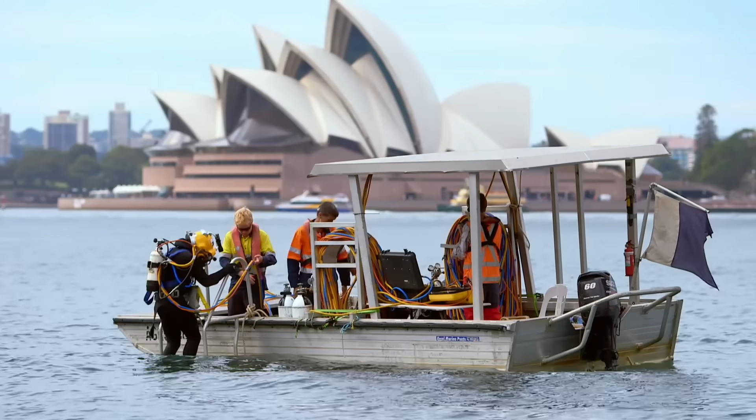No one has ever embarked on the scale of what we're doing here. In Australia, engineers are taking on an extreme challenge. There's constant problem solving. Every day there's new problems, new issues. Trying to clear suffocating traffic congestion by building an immense state-of-the-art metro through the heart of Sydney. We have to get there, there's no other way.

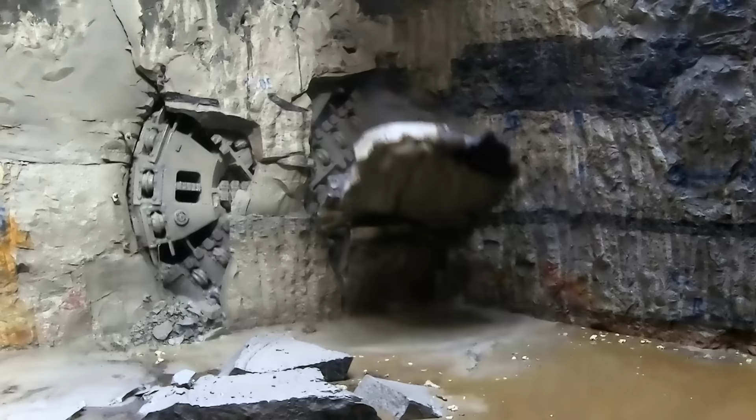The stakes are high. You've got to take every bit of luck you can get in this game. This is, by far and away, the biggest public transport project in Australia's history. If I'm honest, I probably didn't quite know what I was getting myself into.

Sydney, one of the most recognisable cities in the world. It's got the Opera House, the Harbour Bridge, Bondi Beach, and traffic. Endless traffic. But that's about to change. Now a crack team from around the world is tackling the problem head-on, battling to build a world-class metro without bringing the city to a standstill.

They've come from the UK. Mega projects gets thrown around like confetti. What makes us different is just layers and layers and layers of mega. It should just fit together like a really nice Meccano project.

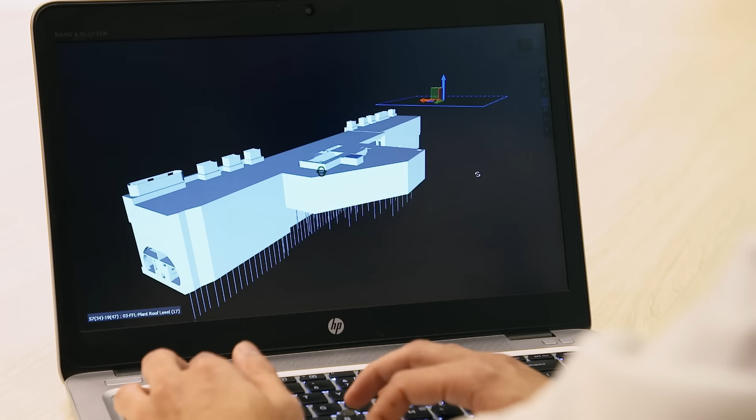From the US: I'm here to dig tunnels. I'm here to do stations, excavations, you name it. I love it.

From France: the design for Sydney Metro is unique, a very creative design, only for Sydney. From Germany: when we are tunneling under Sydney Harbour, there are no second chances. And from Italy: it's the future of mobility for this city.

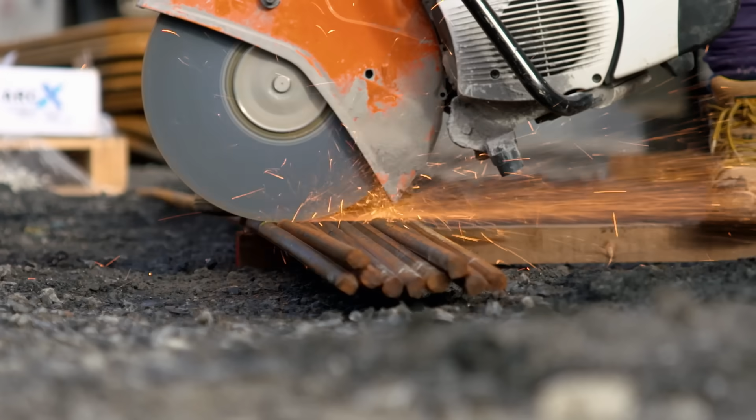40,000 people will build this metro, most of them Australian. It's definitely the biggest role and responsibility I've had. I'm loving it. I've personally developed and grown working on this project, and I think the whole team has. It is interesting. Not very often you get to dig a big hole right in the middle of Sydney.

The hole James Pearce needs to dig is in the toughest location imaginable: right in the middle of Central Station, the busiest rail hub in the entire country. 99.5% of Sydney trains travel through this station every single day.

So it's a huge undertaking. We've got 4 pedestrian tunnels through the middle of the station box, and 3 of them we need to keep open at all times, 24 hours a day, 7 days a week, 365 days a year. The station doesn't shut down at all.

James has to remove more than 500,000 tonnes of earth, 6,000 tonnes a week, without disturbing Central's almost 2 million weekly passengers. It's a highly complex task. But James is up for the challenge.

So here we are right in the middle. These platforms all need to go to let us dig 30 metres down into the ground and connect into the new tunnels, which will be the metro trackway. So all these platforms, time to go. Pigeons out, we're coming in.

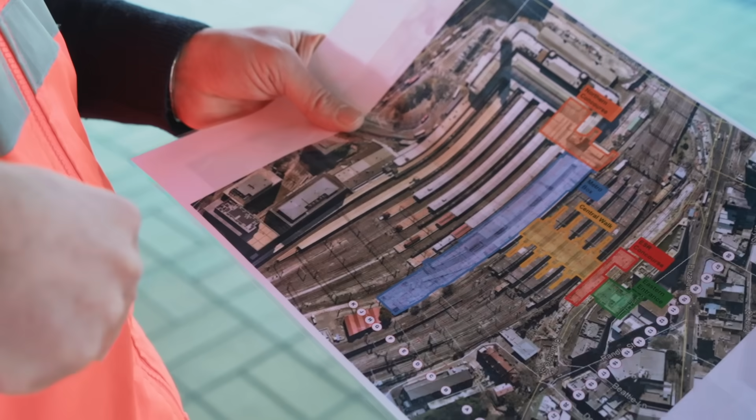His solution is simple: if you can't go around the passengers, go over them with a truck bridge. There's no access the whole way around Central Station. 230,000 cubic metres of material to come out. Every single truck movement for the project will be in and out over that bridge, one way in, one way out.

A 500-tonne crane, with the largest beam 55 metres long. James is only allowed to disrupt train services for 12 hours, so they're bringing in a prefabricated bridge, 400 tonnes of it, fully sealed, so they can drop the concrete in.

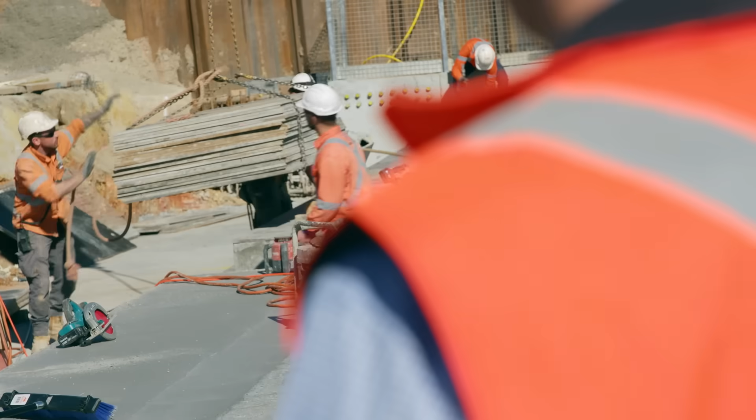It will be a race against time to crane in the gigantic steel spans. Right next door, lines will remain active, with 1,500 deadly volts that must be avoided. Abutment B is extremely close to the live rail. James backs himself and his team to get the job done before the Monday peak arrives.

It's going to be a totally different scene on Monday morning. There's going to be a whole heap of steel across here, and the trains will travel under the bridge for the first time. Digging up the middle of Central Station is just one of the many enormous challenges that confronts the team.

From here, one line needs to run north through a minefield of subterranean obstacles deep under the city, under the harbour, and 50 kilometres out to the northwest. Running south from Central Station, another line will swing 20 kilometres out to the southwest. Next, another line will leave the city and travel 25 kilometres due west to Parramatta. Yet another metro line will then connect a new international airport with the rest of the city. And further still, more lines will create a virtual metro loop around Sydney.

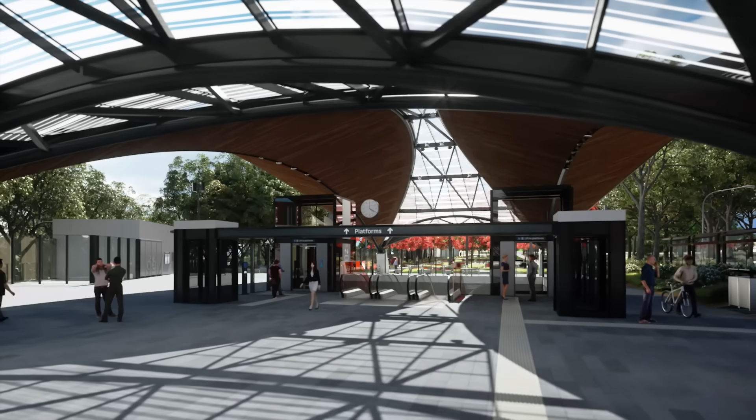More than 50 new or renovated stations need to be built, linked by the longest railway tunnels ever dug in Australia. This project is exceptionally ambitious, and it all needs to be constructed in just a few short years. At every turn, new complex dilemmas await.

One such dilemma looms at a new station site right in the city called Pitt Street. Bobby Saying is in charge of excavating this station. He has to carve out two giant holes between the skyscrapers - no easy feat considering the cramped inner city location.

Bobby's mission is to demolish, then dig. There's a total of 12 buildings we're demolishing. There's a 14-storey building here, there's a pub in the corner, a number of 1 to 3-storey buildings around the rest of the site. There's also another 4 buildings at Pitt Street South.

The access on the streets surrounding the site are very limited. The hard part is actually getting that first bit of access so you can drive trucks in, load them, and then they go out. That's correct, yeah.

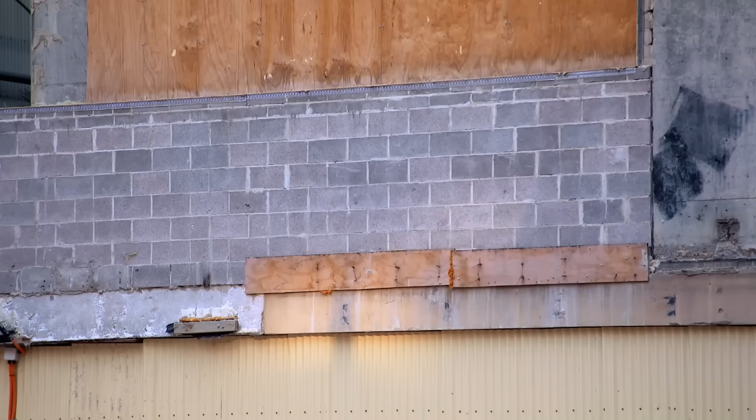12 buildings bite the dust, but one must stay. It's 41 stories high and towers over one of the massive holes Bobby needs to dig. 76,000 tonnes of earth must be extracted right next to the building's foundations. If anything goes wrong, it could be a disaster.

We're about to dig down a really big hole right next to a 41-storey building. There's a risk that because that building relies on this ground for support, as we excavate, it will cause movement.

It's no ordinary dig. As Bobby's team descends in the skyscraper's shadow, they must shore it up from below with reinforced concrete walls up to half a metre thick. They'll work slowly but surely, inch by inch, to build a concrete rampart.

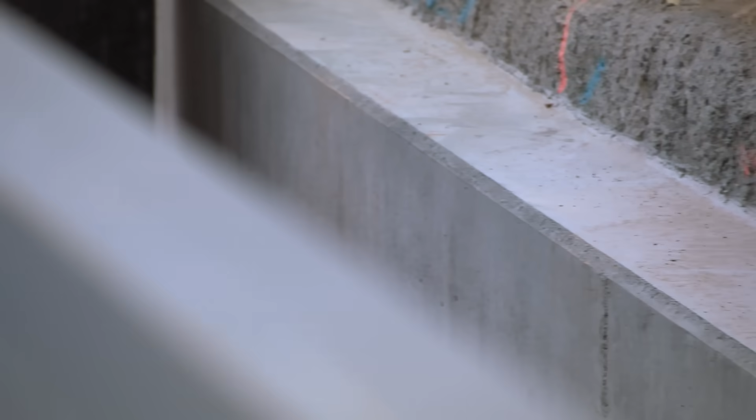We can't take away the entire shaft material and then install the wall. We have to progressively do it as we come down. Otherwise, there is a risk of movement of this 41-storey building.

To make matters worse, Bobby's work sites are surrounded by bustling buildings and businesses. They all need to keep functioning while he demolishes other buildings and then digs his super-sized holes right next door.

This is fire station number 1 in Sydney CBD. Our site is located on the back face of this building, the busiest fire brigade in the Southern Hemisphere. We need to ensure that we don't block their driveways, that we're clean and clear around their site. They operate 24 hours a day, and therefore they have sleeping quarters there as well, so we need to make sure that during the sleeping times we're not creating a lot of noise.

On the other side, there's a pub. It's also heritage listed, so a good reason not to demolish it, but it is a beautiful building, and I'm told it has a great beer. There are places people want to enjoy a quiet drink, and places where people need to sleep.

This is a hotel, and so you have guests, and you need to keep them happy. And also, in our interest to keep our neighbours happy, because we have to work with them for years on end. Gloria Fernandez shares responsibility with Bobby for trying to get this station done.

Keeping the neighbours happy is one of their top priorities. Noise has been one of the bigger complaints, as well as dust. And so really, when we put this acoustic shed up, that actually decreased the amount of complaints in that space. It's not just about doing the work and carrying on - it's about working with the community and our surrounding neighbors.

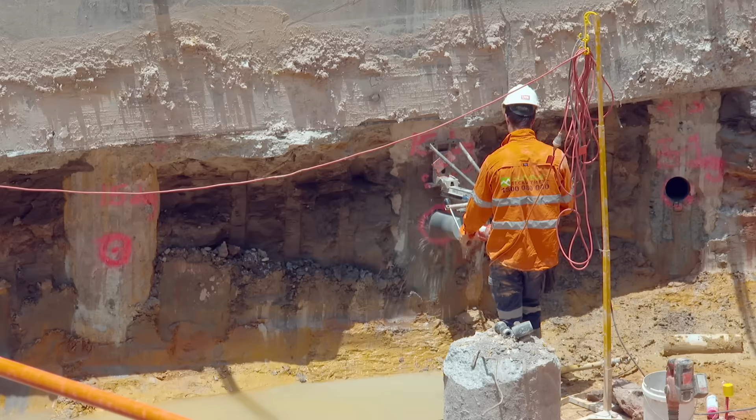With a site cleared, it's time to start digging. It's been going great. We're about 4 metres deep at the moment, and it's a total of 20 metres deep once we're done. His main concern remains the 41-storey building towering right over the hole.

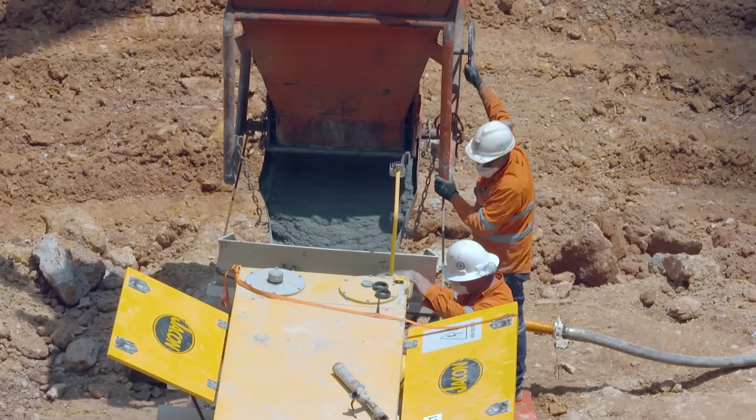As we excavate the shaft and we expose what is left there adjacent to the building, it's something that we have to look at, assess, and get our designers involved to ensure that what is there matches what their assumptions were - and so far so good.

So can Bobby be sure the skyscraper next door won't begin to lean in over his hole? I'm very confident, and I'm very hopeful, but I'm very confident that everything will be under control and we won't end up with the Tower of Pisa.

The vision for Sydney's new metro is breathtakingly bold and far-reaching. This is the man responsible for it, engineer and transport chief Rod Staples. He is both proud and often overawed by what he has set in motion.

No one has ever embarked on the scale of what we're doing here. This is, by far and away, the biggest public transport project in Australia's history. If I'm honest, I probably didn't quite know what I was getting myself into at the start. When it goes wrong, where do I go to blame someone? I go and lock myself in a room and have a good hard chat to myself.

Rod is actually not the first person to have championed a Sydney metro. Remarkably, the idea was originally suggested more than 100 years ago, the brainchild of engineer John Bradfield. In 1915, Bradfield submitted a grand plan to government to revolutionise Sydney's transport infrastructure. Bradfield wanted to build a bridge across the harbour, electrify the trains, and create an integrated, efficient railway system, much of it underground, just as was being done in London, New York, and Paris.

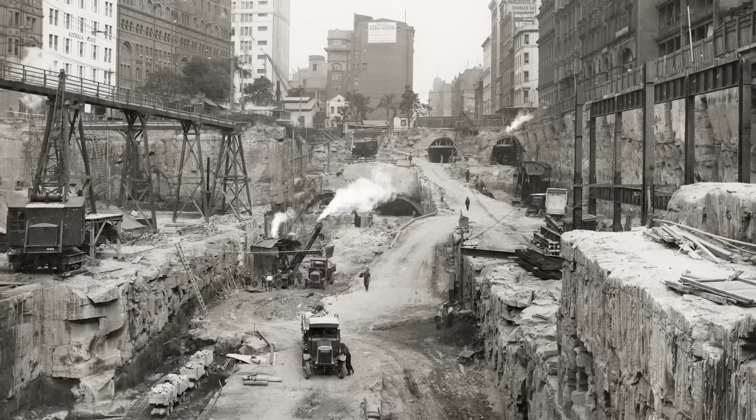The First World War intervened, and Bradfield's plan was shelved. After the war, Parliament approved the plans for the Sydney Harbour Bridge, and the building of that John Bradfield icon began. By 1926, work had started on Bradfield's other vision for a Sydney metro. Some new underground city stations were built, but then work stalled.

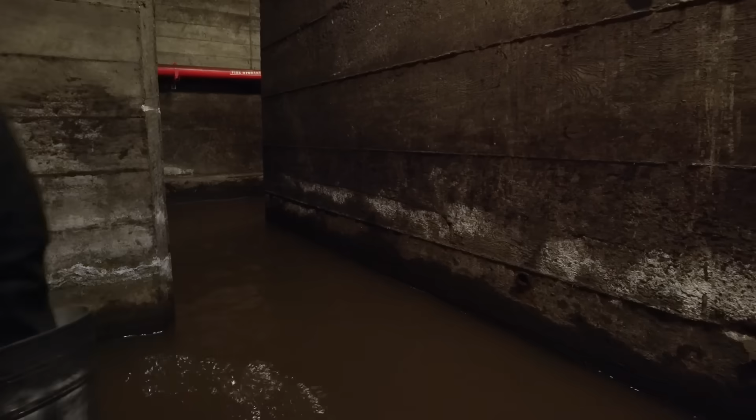Beneath Sydney are almost 1.5 kilometres of unfinished platforms and train tunnels, the incomplete remnants of Bradfield's metro. During the Second World War, the tunnels did prove useful as bomb shelters. These walls weren't here originally, they were put in for the air raid shelter, not for the railway.

The original vision for these tunnels, however, almost did become a reality. So this platform was completed nearly 100 years ago, even to the point where the tiling's in and some of the signage is up. But it never, ever saw a train run through it.

If you took yourself back to the 1920s in Sydney, it was an unprecedented amount of construction going on. People believed in Bradfield's vision and they were getting on with it. We get to the end of that decade, the bridge is finished, a bit of the plan for the railway is finished, and then the Depression hits. The money's not there. And then before we know it, World War II, and that's it, game over.

The focus really turned to other things. Fast forward to the 1950s, the car becomes the thing that everyone wants, and so the desire, the appetite to finish that plan disappeared. I just think to myself, wow, what a lost opportunity for Sydney. That really just drives me to say, well, let's go back and finish the job that he started.

Rod is on a mission. He is determined to realise what Bradfield could not.

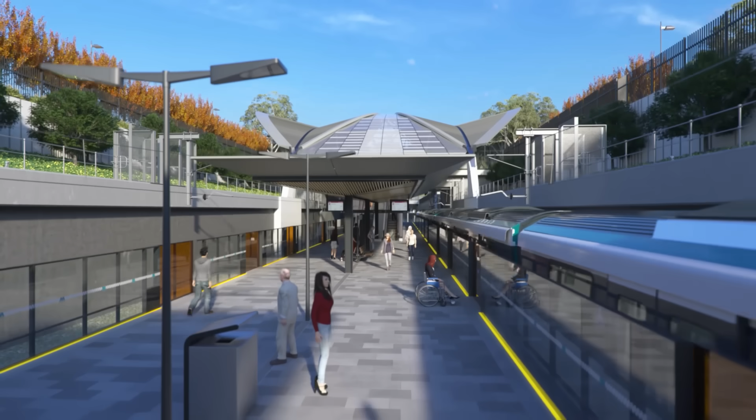Rod was convinced metro was the way of the future. Convincing others was harder. Transport officials, including Rod, said to me, 'We don't think it's sensible building the same old kind of rail line, you've got to go for a metro.' The challenge for Rod and the team was set, but what confronts them is a city that has changed radically in the last 100 years. In Bradfield's time, the population was 800,000. It's now more than 5 million.

The digging of Sydney's first train tunnels was a painstakingly slow and laborious task. Some were dug in the more traditional way, using drills, dynamite, picks and shovels. Holes were dug, walls built, and the whole thing covered over. Today, train tunnelling is a very different affair.

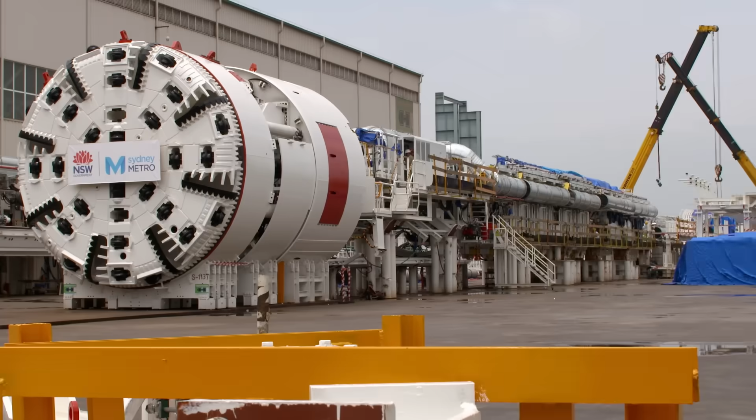Meet an extraordinary invention, the tunnel boring machine, a TBM. Sydney has ordered 9 of these. A factory in Guangzhou has just about completed the first ones for central Sydney. These mechanical beasts were designed in France and Germany.

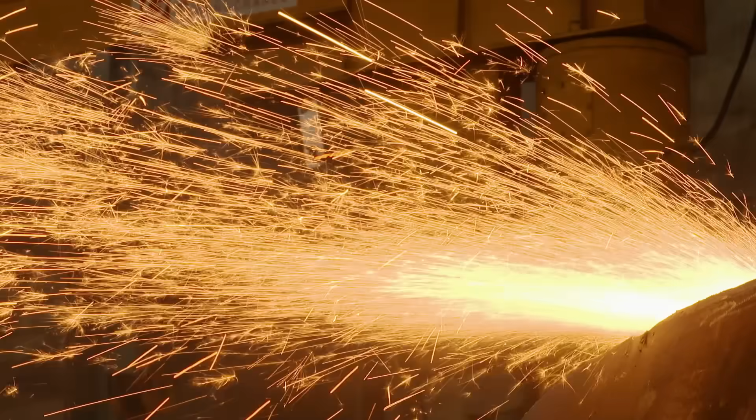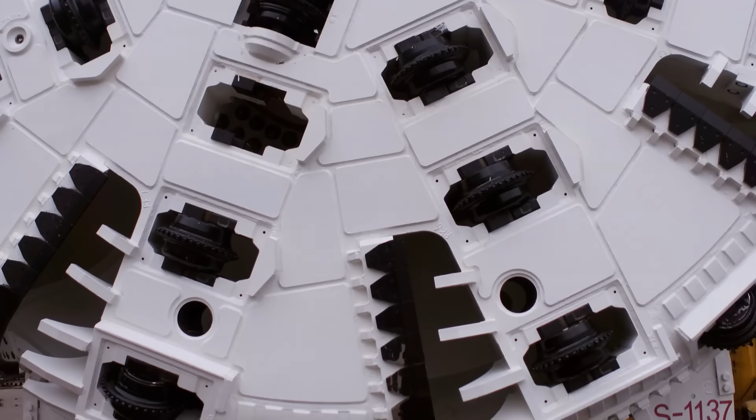TBMs are gargantuan, intricate machines. Each one will take 6 weeks to build. When assembled, they weigh more than 900 tons. A single TBM can cost more than $15 million and can cost $1 million a day to run. One stretches more than 150 meters end to end. This is the very front of it, the cutter head. This wheel of steel, more than 3 stories high, slowly rotating, pushed by powerful hydraulics, will crush and grind the rock ahead of it.

Openings in the cutter head let the crushed rock enter the machine. Conveyor belts then transport the spoil back all along the machine, out through the tunnel.

Coming up the tunnel, concrete segments. A robotic arm picks them up and places them against the rock walls, six at a time. It creates a ring of concrete, then does it all again and again. As it inches forward like a giant mechanical worm, it leaves behind it a fully formed, completed tunnel.

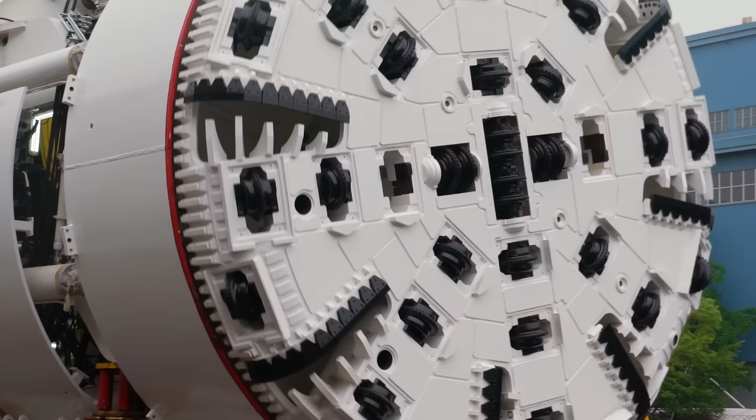It's time to test that this one works. The machine is fired up and turned up to high. Overseeing four weeks of tests is Martin Bell. This is just really proving that the machine's finished. The machine will do what we've asked.

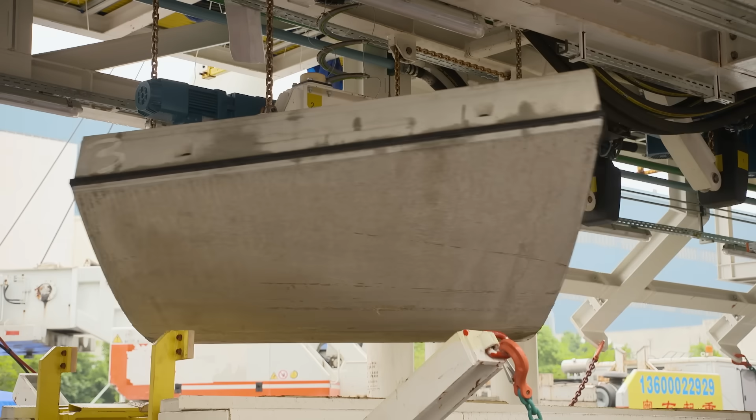It's really designed to simulate excavating the machine without actually excavating, if you like. So we're doing a trial run of all the functionality. It's basically a mobile factory at the end of the day. Once the machine's built and running, then everything's like a sausage factory, is the way it's described.

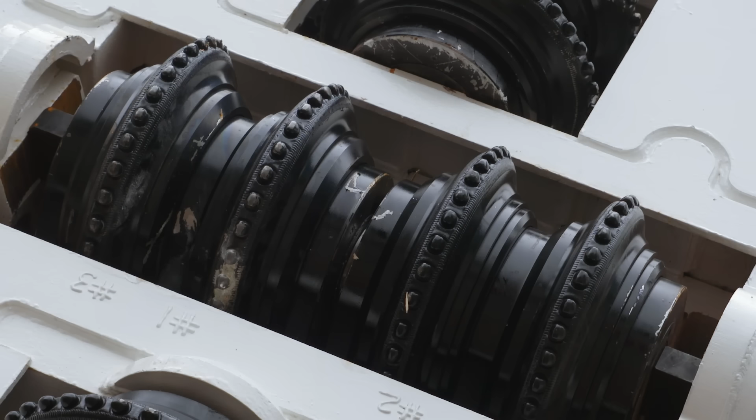Like a performance car, this TBM has been modified to help it go faster. We've introduced TCI cutters to the cutting head, so they're a button cutter. Those cutters allow us to cut a lot further. They're better suited to the sandstone conditions and minimise the amount of cutter changes we need to do.

So, does it meet the specs? Did this TBM pass the test? It's a high-quality piece of equipment. I'm excited. I can't wait to put it together and put it in the ground. That's really what it's all about.

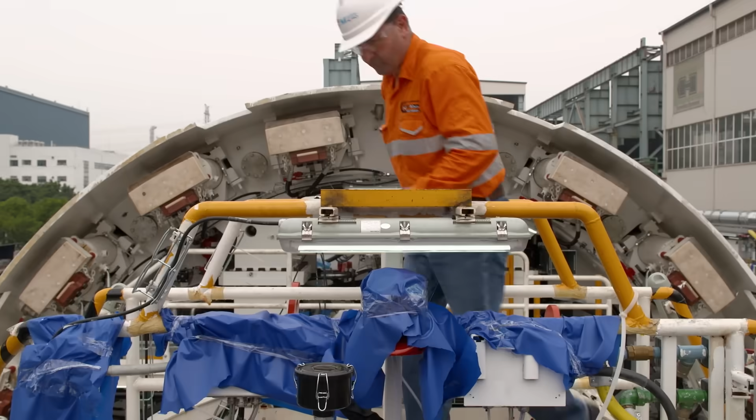And now it's the nervousness of putting it on the water and hoping that it gets off the water and gets to site. But yeah, it's a pretty proud moment. It's like being a father, I suppose. That's one down and on its way.

Back at Central Station, the clock is ticking. James Pearce and his team are in a race against time to crane in the giant steel girders of the truck bridge. He needs to get them in and balanced above the tracks before train services resume beneath. All around him, other trains keep running.

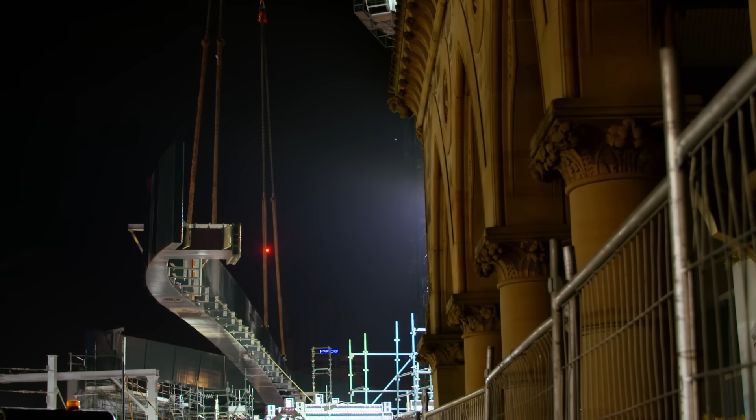So the suburban lines are continuing to operate this weekend. The intercity lines are shut down for the possession to lift in the major steel trusses over the live rail. That has been shut. We've got 48 hours between Saturday morning and late Sunday night to do all of our work and hand back the rail for Monday morning to open for the customers.

There are eight huge pieces of steel that need to be craned into place. And maneuvering them is very dangerous. 1,500 deadly volts of electricity is running through the nearby wires. This steel girder weighs 55 tons.

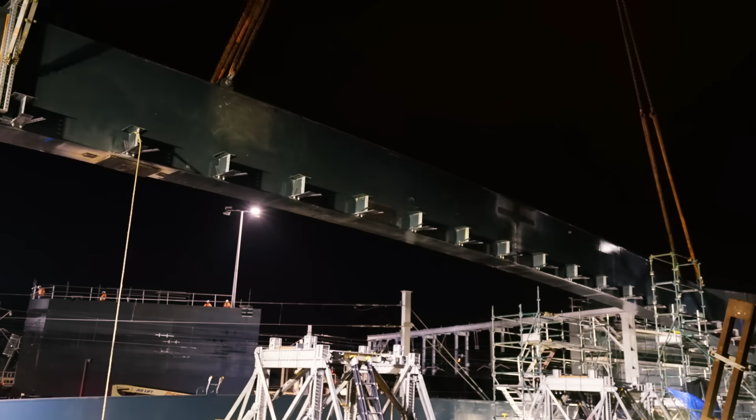We're very limited to what we can do. We've had to install the biggest tower crane in the world to come in and lift over live rail so we can lift them in the modules. They're massive pieces of steel.

This girder is more than 50 metres long, but needs to be placed with millimetre accuracy. They're landed on all of the works which have been constructed previously, so the bridge piers and footings, we drop the steel girders on and bolt it immediately.

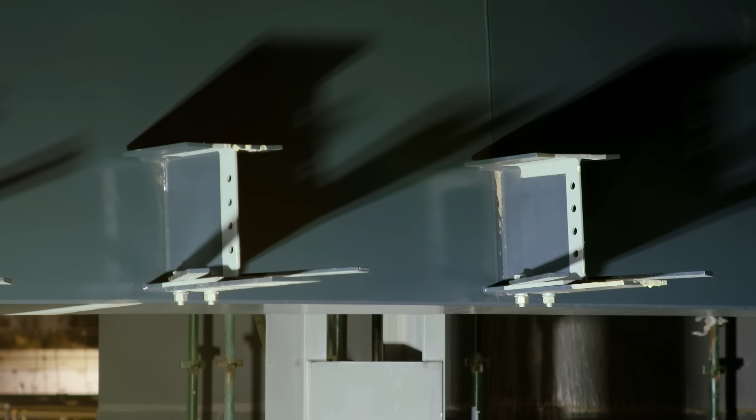One by one, ever so carefully, the giant crane lifts the giant girders into position. There's no room for error. The space is as tight as it's been on any job.

Slowly, the truss bridge begins to take shape. Oh, they're doing a great job here. There's one already in, another one to go, so pretty good night shift at this point, and then we come back later and do the decks on top.

Trucks are the backbone of any major excavation. Deep station boxes are being dug all around Sydney. So an extra 1,000 trucks a day have joined the city's traffic snarl. 1,000 trucks in and out of the city, normally with trailers, causing congestion, blocking intersections of traffic lights. It's just not a fun city to drive around anymore like it used to be.

Making sure traffic doesn't grind to a standstill rests on the shoulders of this man, Steve Jones. Even for this ex-British commando, it's a daunting task. It's going to be really, really hard. This is going to be a massive challenge.

This is going to be collaboration on a mega scale. So whether it's the Transport Management Centre that you see behind me, whether it's Sydney Trains, whether it's the ferries, everyone is actually going to have to come together and make sure there's minimum disruption across Sydney while we do it. Steve is fighting a constant battle to keep traffic moving.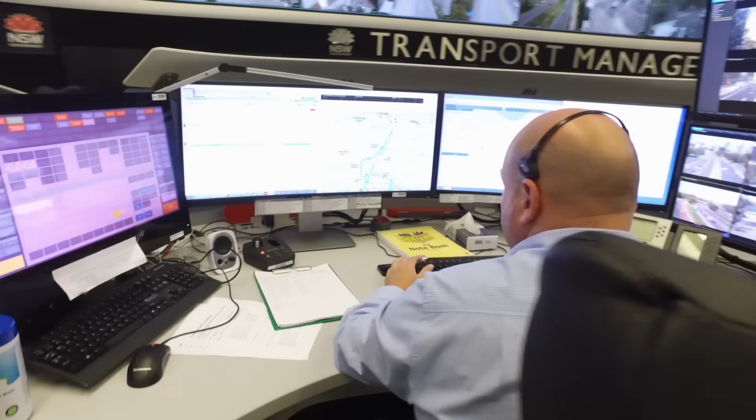In this room are 18 specialists monitoring roads, traffic lights, buses, trains and ferries. Each scrutinises their piece of the transport maze, trying to unravel problems that pop up minute by minute with military precision. In their arsenal, they have access to more than 10,000 CCTV cameras.

This state-of-the-art nerve centre is the largest in the Southern Hemisphere. This is our Apollo 11 Mission Control Centre. This is where everything occurs, this is the integration. And I say to everyone, for me, it's like that swan - it looks elegant and everything looks calm around us. But underneath, there's lots of people working really, really hard to make sure everyone gets to their destination as smoothly as possible.

So can you tell us literally what's happening now, Dave? So we're just after peak this morning on a Thursday morning, which is one of the busier mornings.

From this command centre, Steve can track the movements of hundreds of trucks every minute of the day. Trucking and the logistics is absolutely massive - we're looking at around 1,000 trucks a day in that CBD. We do all of the planning up front to make sure that disruption is kept to a minimum.

Steve knows he needs to win this battle against congestion. Whether you're delivering infrastructure or on the battlefield, it's about continuously improving, continuously testing yourself. There's a new challenge every day, and it's testing me every day.

Steve has to be very careful of the powder keg of frustration already out there. There's trucks both sides of the road - they close the roads for some time, so it caused a lot of problem with the traffic. I understand they've got a job to do, and they have to do it for the metro, which will make things so much better for people in the long run, we hope.

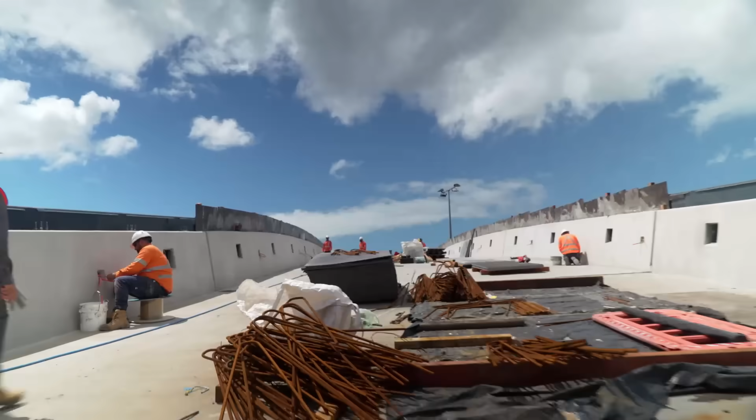Back at Central Station, James Pearce is in a battle of his own, again racing the clock. Until his truck bridge is up and running, he can't dig down, he can't get anything in or out. Once the bridge is finished, it'll be full steam ahead - fully laden trucks passing right over the heads of train passengers, passing through Australia's busiest station.

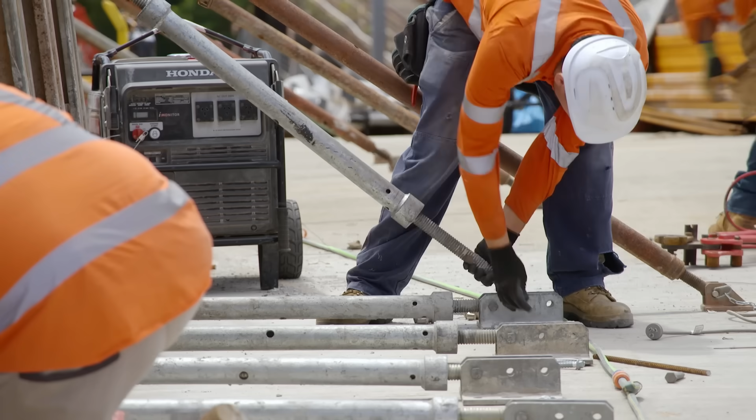So the guys have done a great effort getting the steel in. Next step, concrete - there's a thick deck to go in here, which will enable the truck bridge to carry fully loaded trucks, both in with materials and out with spoil for the main Central Station works. For James, there's one ultimate nightmare scenario.

A truck crashing over the bridge and ending up on the live rail - probably not what we want for this job in the middle of Central Station. A truck plummeting over the side would spell catastrophe, so the bridge has to be reinforced to withstand immense impacts, with big, thick concrete barriers up the side providing protection for all vehicles both in and out. With the barriers completed, James's battle with the truck bridge has nearly been won.

Around 35 kilometres from the city of Sydney is an area known as the Hills District. To build the metro out here, engineers face an entirely different set of challenges than in the city centre. Here, the issue isn't how to connect into an existing station, but where to put the new metro stations. Beneath these hills, Rod's team will dig the 2 longest rail tunnels ever dug in Australia.

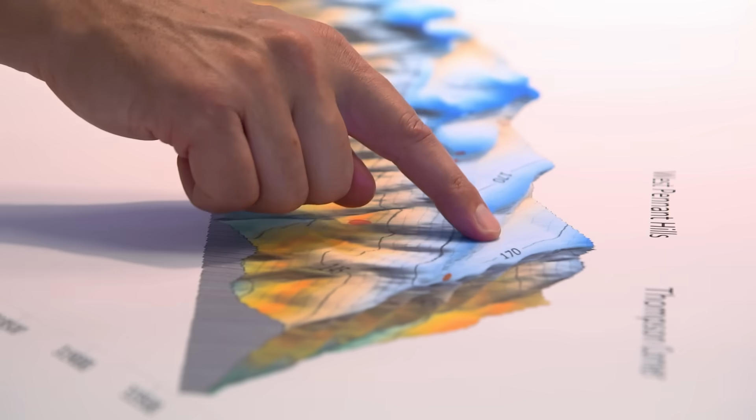The length isn't the problem, the hills are the problem. This big climb up and then being able to stay far enough north to get to Castle Hill was a big key part of the alignment planning. Whenever you're locating a station, it's a real fine balancing act between the absolute best customer outcome and what the engineers feel they can deliver in terms of the depth of the station, the terrain, and also the ground conditions and geology that's underneath.

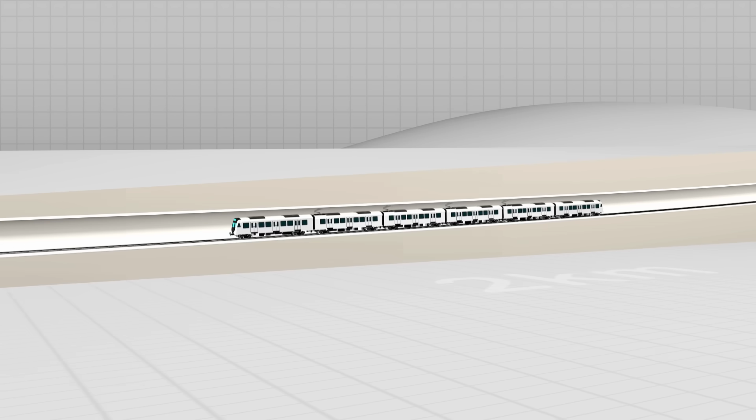The steepest gradient these trains can climb is about a 4.5% incline up or down. So the problem is, in hilly country, a station cannot just be positioned anywhere. If a station was to be placed near the top of a hill, for the train to get there, the platforms would need to be very deep underground. That's not a good result for customers - you just want to be on the train, you don't want to be spending 5 minutes getting from the surface down to the train.

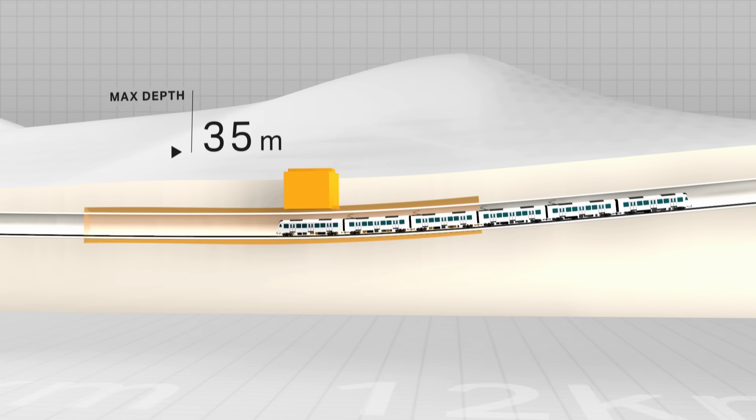So the shallower we can make the stations, the more attractive it would be. The deepest station in Sydney is about 35 metres, and customers find it frustrating. So for Rod and his designers, finding the right route and placement of stations is a careful balancing act.

They have to ensure the depth of each station and the maximum incline trains will travel to reach them is achievable. Where to put the route and where to put the stations was a massive challenge, not just from an engineering point of view, but from a whole community point of view as well.

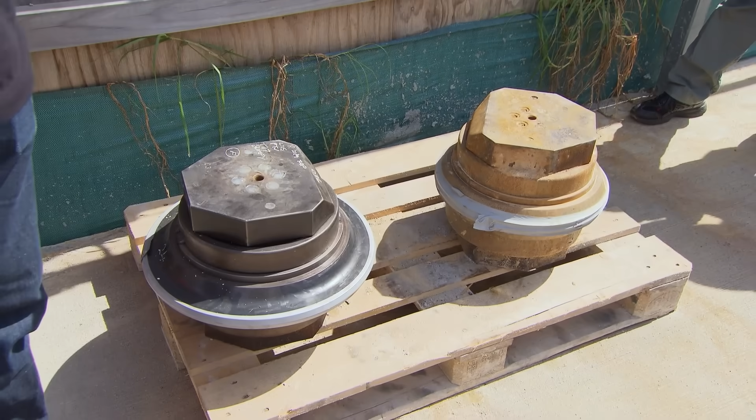In this area, Rod has had to carefully manage community expectations. Rail has long been promised here, but never delivered. People were crying out for it. There'd been decades of debate and argument about building this railway. And when I first stepped out there, I think a lot of people intuitively believed that yes, this would help, but no one actually believed that it would happen.

Rod is making it happen. For him, there's no other option. This area of Sydney has the highest level of car ownership in all of Australia. Here, triple car garages are the norm. A metro here should eliminate 14 million car trips every year. People just need to leave their cars in the garage and instead travel beneath the hills and far away.

Back at Central Station, at last the truck bridge is up and running. But James's real work is only just beginning. It's demolition time. Now 3 railway lines have to be dug up, and again, they've only got 48 hours to get the job done.

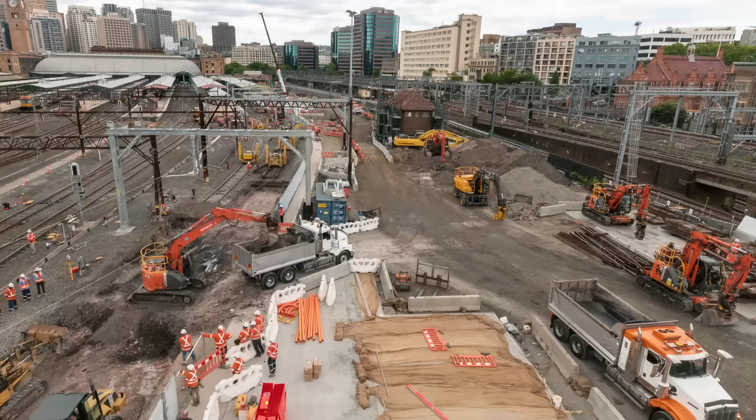From 2 a.m. Saturday to 2 a.m. Monday. To allow us to build the Metro box, we need to remove 3 tracks, 13, 14 and 15. Again, James is racing the clock. It's a critical point with limited time. We get a 48-hour window, we'll turn off the power, relocate all the wires, and then we put it back in, turn the power on for commuters on Monday morning.

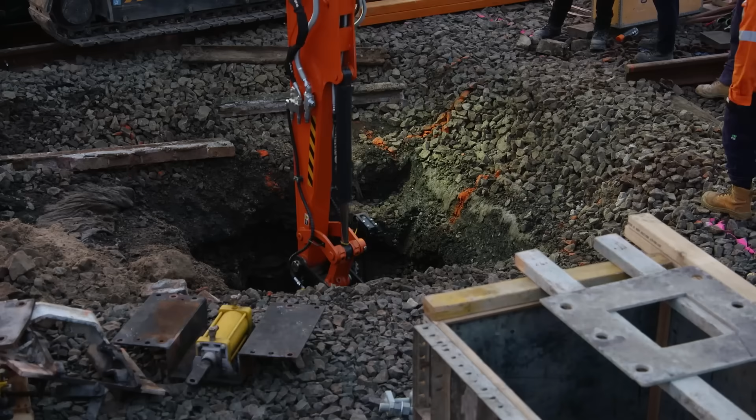As darkness descends, the rail gang gets into top gear. James first needs to remove the old tracks and then lay new ones and new overhead power lines that will divert trains away from the platforms to be demolished. 48 hours, that's it. We don't have any more time and we need to get the tracks open for customers on Monday morning. The clock is ticking and the team are pressed for time.

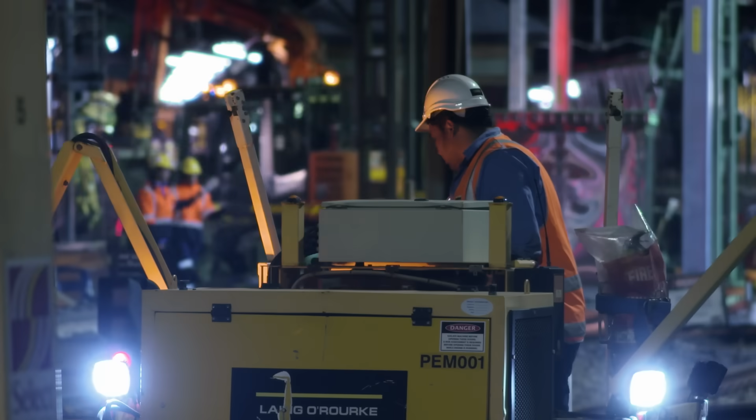But they can't jeopardize safety. There are 200 people working here, surrounded by moving double-decker trains and live power lines. Some are just 4 meters away. We're dealing with live rail, we're dealing with buried services and signal cables, we're dealing with turning the overhead wire back on and the reinstatement of it. It's a huge piece of work compressed into 48 hours.

As Saturday ticks over into Sunday, there's still an enormous amount of work to do. Soon there's only 22 hours to go. Time is rushing by. Moving the overhead lines is one thing that can't be rushed. All the surrounding lines are still active. 1,500 volts courses through each of them.

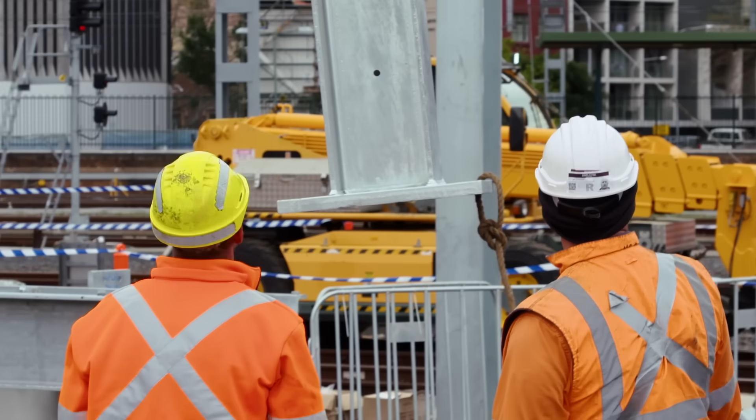We actually need to relocate the track and the overhead wiring. So all of the guys here are working together to do it safely, but we do need to recognise live power on both sides, very specific controls on both the cranes, excavators, and with all the people doing the work.

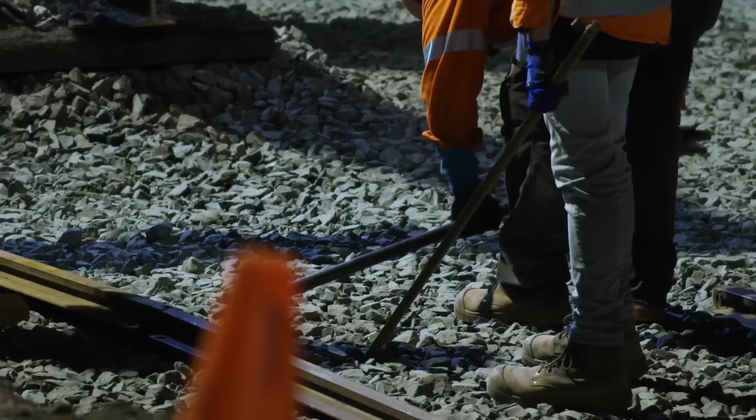Finally, the old track is gone, and as night descends again, time is running out. The pressure is building. If they don't finish in time, there will be nowhere for trains relying on these 3 lines to go. Monday peak hour will be chaos.

Then a strange-looking machine is brought in to speed things up. It's called the crab walker, and it's obvious why. To save time, the new track is prefabricated off-site, and the crab walker lifts it carefully into place in large pieces. The crab machine, or the PEMLEM, comes in and speeds it up rather than laying every sleeper by sleeper.

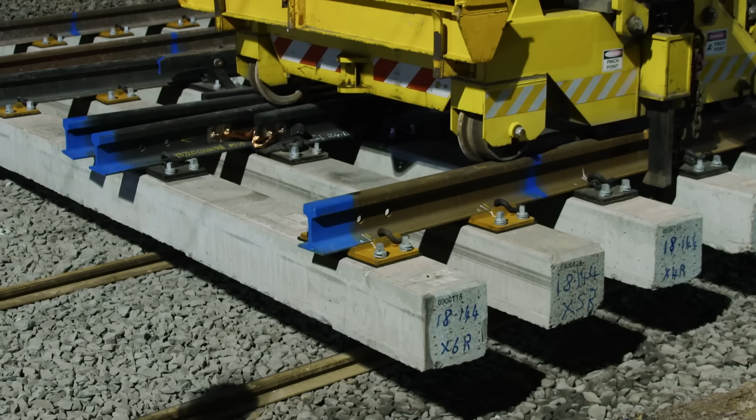The new section of track gets picked up outside the alignment, the crab walks across, drops it into place, and then we tie it in and reinstate the ballast, tie the track in, open it up and away we go. We've got about 2 hours to go, everything's on track, no pun intended, should be right. And the trains will be back in a few hours for Monday morning peak hour. They make it with 2 hours to spare.

About 160 kilometres from Sydney is the port city of Newcastle. It receives thousands of trade shipments from around the world every year, and now the gigantic TBM components are starting to arrive.

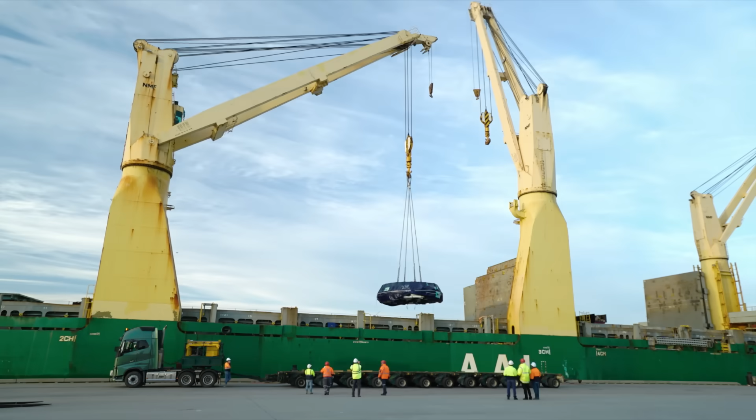Some of the modules of these monster machines are extremely large. The cutter head alone weighs over 100 tons, and this shield weighs over 200 tons.

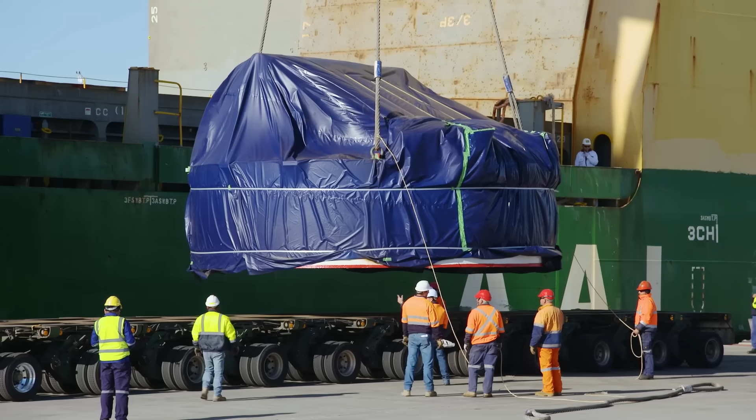After the 8 separate hard rock TBMs are offloaded in Newcastle, these huge pieces of machinery will be transported by road to 4 different launching sites around Sydney. This part of the delivery has been months in the planning, but will need to be executed precisely to succeed.

The first 2 TBMs travel to a site in Bella Vista. The next 2 will be launched at Cherrybrook. 2 more will travel to Chatswood, and the other 2 to the inner city suburb of Marrickville.

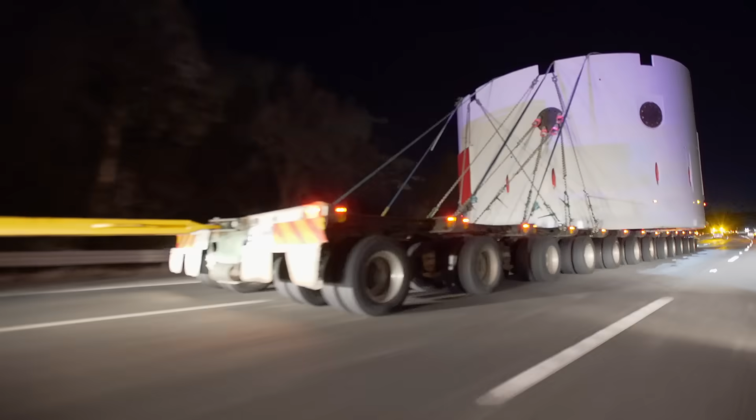The best way to achieve this is with a convoy of trucks. Like a military operation conducted under the cover of darkness, the convoy sets off. 1 TBM equals 900 tons of gear, which equals 23 trucks.

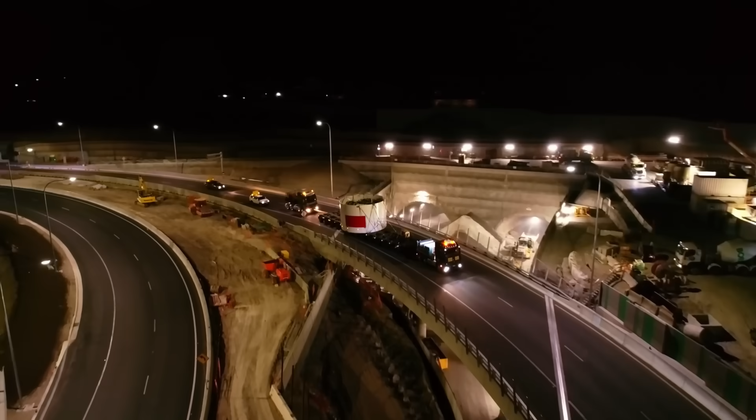Along the route, police and emergency vehicles clear the roads ahead. The route has been carefully mapped out to avoid weaker bridges that could be severely damaged by such heavy machinery, and those that are too low for the trucks to fit under. Some are cleared with little to spare.

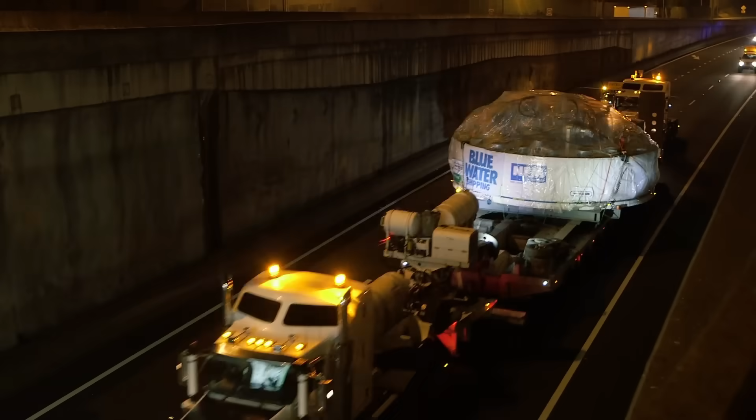The further into the Sydney suburbs they get, the harder it gets. Again, time is running out. With rush hour just a few hours away, the convoy is under increasing pressure. As the streets narrow, every metre is hard won. There's danger on all sides, but safety is paramount. Power lines have to be lifted by workers, parked cars dodged. It's an obstacle course. One wrong move and the whole convoy could come to a grinding halt.

Luckily, these are no ordinary trucks. This rig has 132 tyres. To navigate some of the tighter turns, another prime mover needs to steer the trailer from behind. The drivers behind the wheel are highly skilled specialists with nerves of steel.

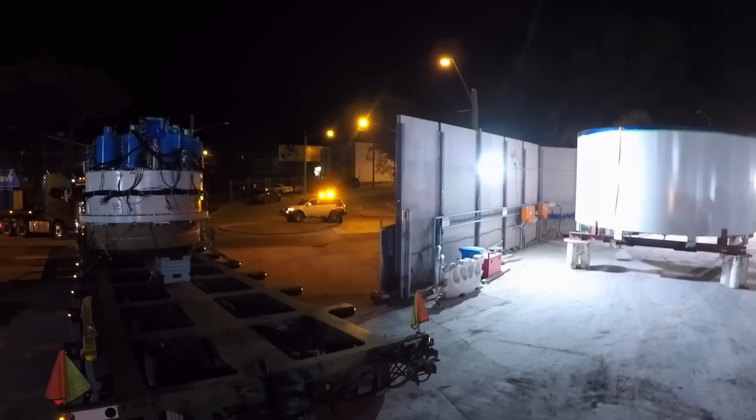The convoys reach their destination just before peak hour. All the components are offloaded. Now they work around the clock to get the machines up and running so the all-important tunnelling can get underway.

Back at Central Station, all train services are back to normal. Australia's busiest station is again running at full steam. In the middle of it all, James faces his next challenge: removing 3 train platforms.

They're in the way of the cavernous station box he needs to dig. The problem is, parts of the platforms have heritage elements. He can't just bulldoze it all.

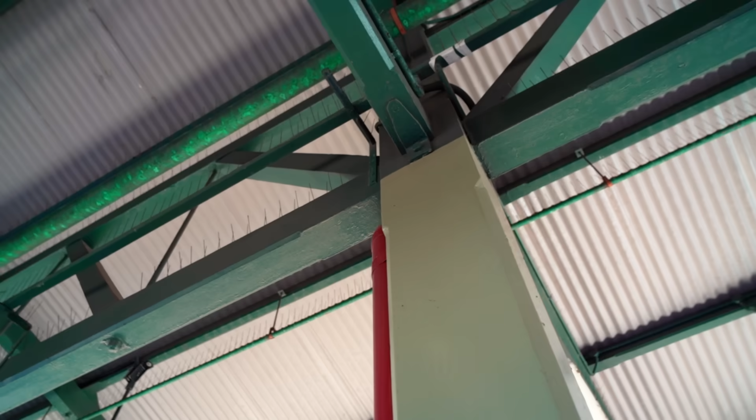So the first thing to go is going to be these timber canopies, beautiful old timber, individually bolted and fully truss framed. Not very often you get timber like this anymore. All of the signs, all of the clocks and everything in here is heritage and well worth preserving. We'll do our best to look after it.

Platforms 13, 14 and 15 disappear. Platforms 13 and 14 will later be rebuilt when the new metro has been completed below, but one platform is doomed and will never be seen again. Platform 15 is gone. It'll go 12, 13, 14 and over to 16 on the suburban line.

With all train services at Central Station now back up to speed, James and his team are again surrounded by live railway lines. From here on, nothing will be switched off to assist him. We've got the intercities live and we've got the suburbans live.

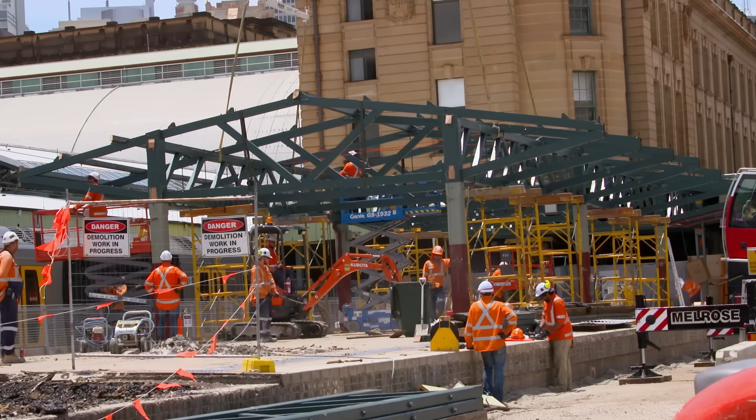So we're working with cranes, excavators and pulling down pretty big buildings as well as demolishing in the middle of the live rail. The railway isn't switched off for what we're doing, and we're doing this all in a very constrained space. As the heritage structures are pulled apart, problem after problem needs to be addressed.

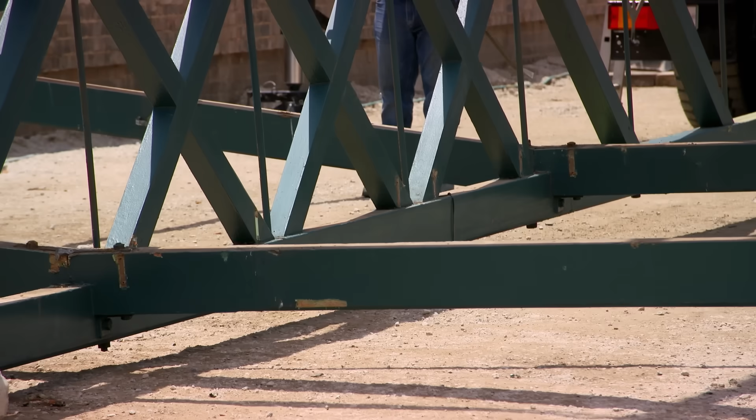There's existing lead dust in there, which has been there from the train brakes over a number of years. There's services throughout them which we have no idea where they're running. In addition to that, it's a fully bolted truss frame, so we're really undoing 60 to 100 years of history in the turn of a bolt.

Soon, this part of Central Station is consigned to history.

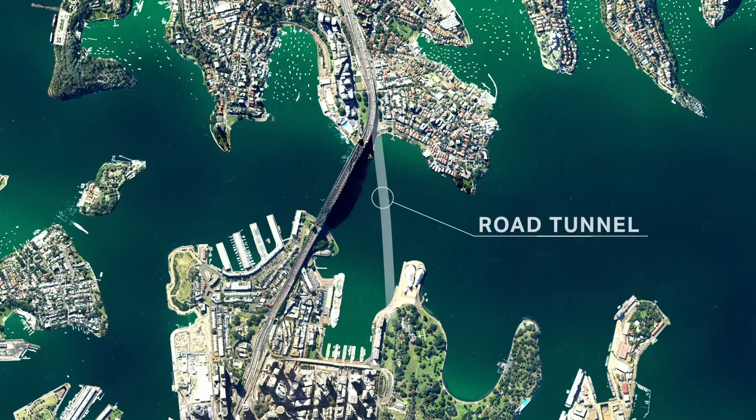Currently, there are only 3 ways to cross the harbour: the bridge, including rail, a road tunnel, and the ferries. The new metro will revolutionize this situation. For the first time in nearly 100 years, Sydney will have another rail crossing of the harbour.

2 new rail tunnels will be excavated deep under the harbour and join with a brand new station called Barangaroo. This underground station needs to sit on the very edge of one of the largest and deepest harbours in the world, and all of it will be below sea level. One of those responsible for making this station happen and safe is engineer and design manager Ali Shad.

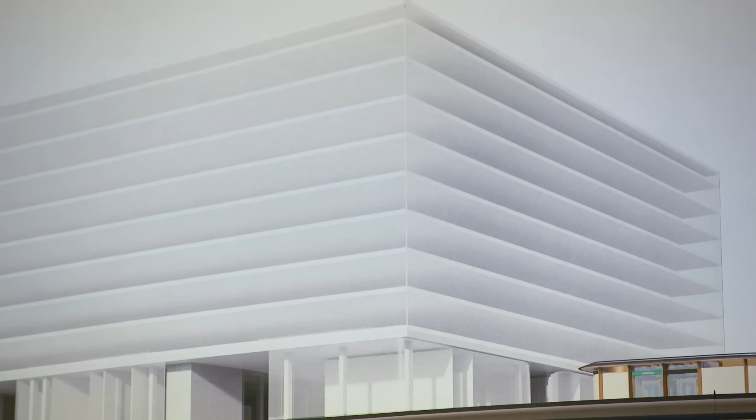So this is our station that we're designing here. It's about 240 metres long, 25 metres below ground, and about 20 metres wide — a really big station. It's basically an iceberg station, a lot bigger below ground than above. All of this is below the water level, so the harbour's just there, and all this is below that. Being below water level right next to the harbour is a major challenge in designing this station.

Ali is well aware of the risks. See this wall here, it kind of just juts out, it kinks out there, and then it kicks out again. We have some unique challenges in regards to the location that we're in, but also some brilliant benefits. We're the only metro station that's going to take passengers right to the harbour front. That's just incredible.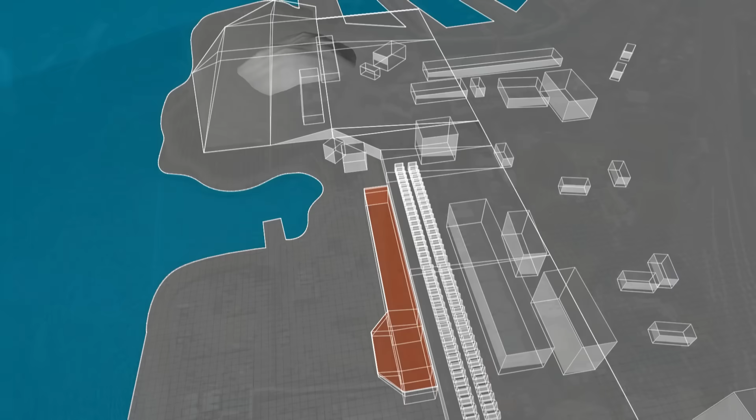To his credit, Ali is determined to see the positives. But this station's proximity to a huge amount of water is a construction risk — not just the water in the harbour, but the water in the ground, seeping in through the rock. The water level is basically above where the station's going to be. The station's going to be in a big hole in the ground at the end of the day, and so we've got to design for the groundwater, which is trying to push the station out of the ground. Not to be too dramatic, it's not going to float away down the harbour, but the buoyancy effect would cause the station to rise out of the ground.

One solution to this buoyancy problem would be to have a sump, a low point from which all the groundwater seeping in could be pumped out. But Ali and his team have decided they cannot rely on this solution. The problem with draining the station is, close to the harbour, we're just going to be pumping and pumping for the next 100 years. And also, if there's any nasties in the soil, then you're going to have to deal with them as well.

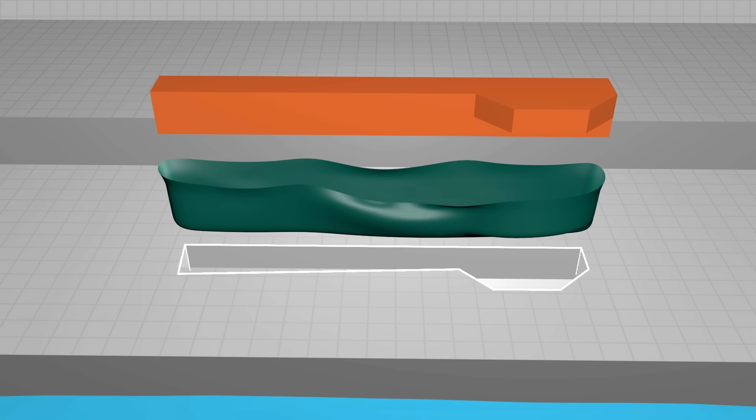To make his station completely watertight, Ali plans to wrap the entire immense station box in plastic, without a single gap through which the water will be able to get in. It's known as tanking. But it is rarely attempted this way.

And it will magnify another problem. With nowhere else to go, the pressure of the groundwater will build and build. It will eventually begin to push the entire station box out of the ground. Tanking has its benefits, but what it means is we have to lock the station into the ground.

So to do that, we've got all these permanent anchors. These are really big anchors — up to 20 metres long. They contain 49 strands, and each strand is about the size of a AA battery. So in effect, each anchor is about 30 centimetres in diameter, 20 metres deep, and that's what helps lock the station into the ground. Ali is placing his faith in the power of steel to hold back the power of water.

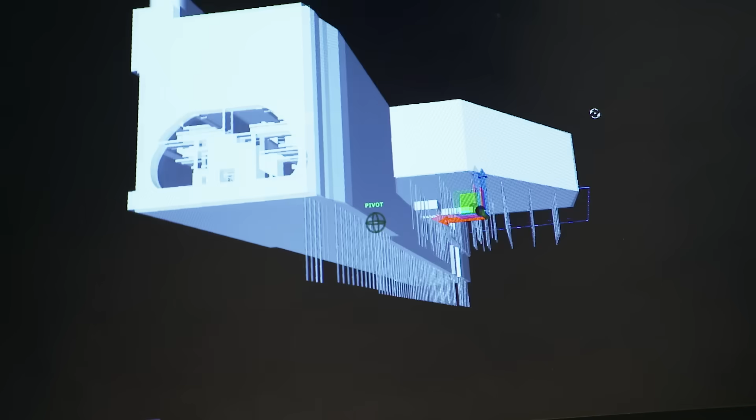To make things even harder, he's not just battling a water problem. His station is very much caught between a rock and a hard place. On one side is the iconic harbour, and on the other side is a considerable wall, and a heritage one at that.

This formidable rock face is part of the so-called Hungry Mile, a name bestowed by harbourside workers during the Great Depression. Last century, this place was crowded daily, with hundreds of men walking from wharf to wharf seeking work. If they found it, they put food on the table. If they didn't, they went hungry.

So this area's got heaps of cultural and historical significance for us, and we've got to be really careful that we don't impact that negatively in any way. So we really want to make sure this Hungry Mile wall doesn't fall in when we're doing our work.

The highest part of the Hungry Mile wall is about 10 metres. The station box needs to be dug right at the foot of this wall, 25 metres straight down. The end result will be a sheer drop of 35 metres. Needless to say, the team want to be sure the top of the wall is rock solid before they turn this into a high cliff.

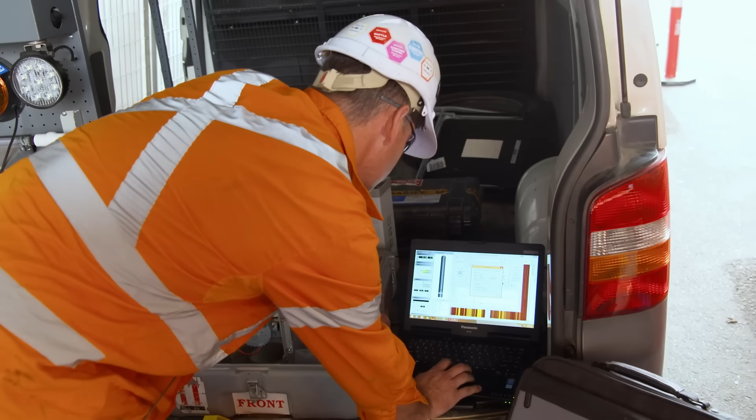We want to make sure that the wall's stable — it's already about a 10-metre high wall, and we're going to be excavating another 25 metres down, so it's going to be 35 metres in total. We want to make sure that it's a good, solid, sturdy wall. The geotechnicians get to work, drilling cores deep into the rock face.

They discover it is definitely not as stable as it should be. They insert rock anchors, which should stabilise and add strength to the wall. It also needs to be covered in mesh, so rocks don't fall on cars passing below.

We've done the analysis and we know exactly what we need to do. So we're going to put in some anchors, some mesh, so we protect the wall and make sure that the cliff face is nice and sturdy.

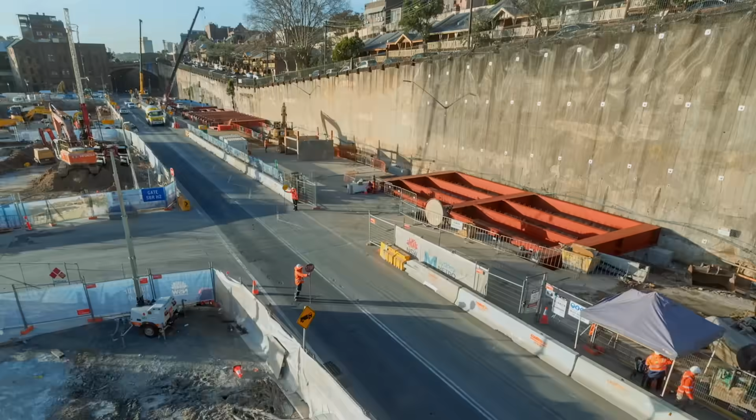Digging down can now begin, except for one small impediment. We're planning to build a station directly underneath the operational Hickson Road, but we want to keep traffic running. So what we decided to do was build a temporary bridge deck to move the traffic over onto a bridge, and that allows us to then dig up the road and build the station, excavating completely underneath it.

The new road takes just 7 weeks to build. Finally, the station box excavation gets underway.

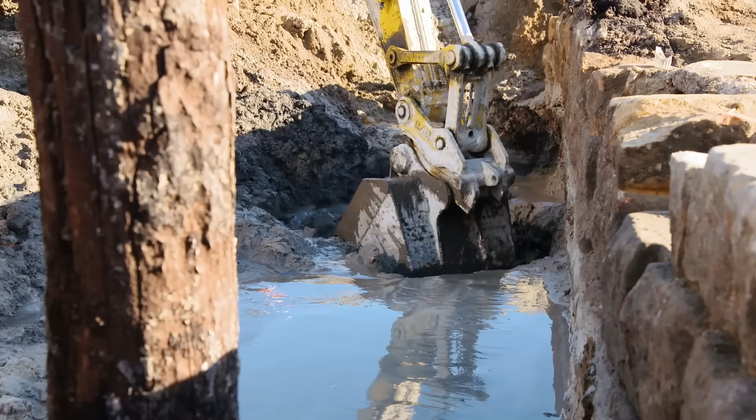Not long after, work grinds to a halt. Yet another predicament emerges from the mud. But we found the oldest Australian-made boat. It's a pretty impressive find. See where that hole's been dug over there, next to the hull? That's where we got the keel.

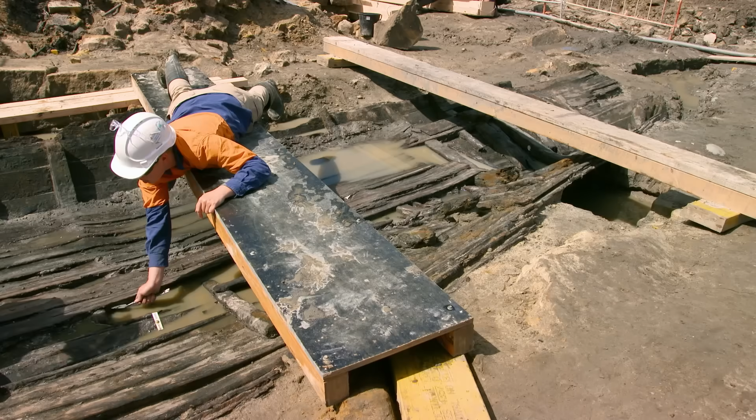Marine archaeologist Cosmos Coroneos is excited by the find. This wreck is the wreck of the earliest known Australian-built ship that we have in Australia. We think it was built around about the 1820s or 30s. It was probably dragged up on what was once a beach sometime in the 1840s and eventually covered over the decades, finally covered over around about the 1890s.

Cosmos's work proves the boat was built in Australia based on what it was built from. It's made out of Sydney blue gum, stringy bark and spotted gum, so local timbers. And that's what helped us conclusively say that it's an Australian-built vessel. It's a floor timber, one of the strongest timbers they have on the boat, and what they've done is used the natural curve of branches to make that timber. So they were very skilled at what they did with the little that they had.

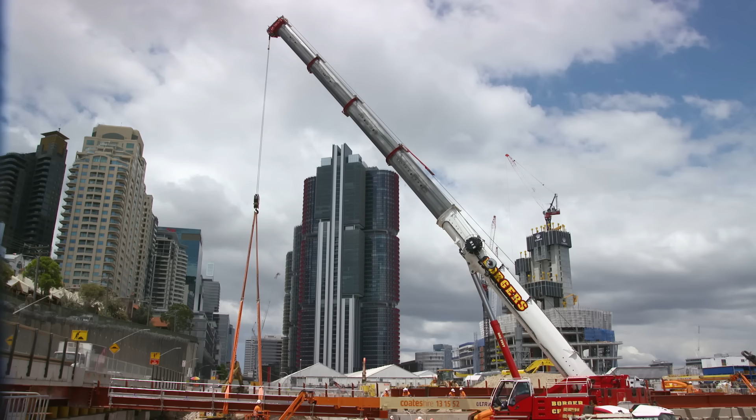Cosmos wants to excavate the entire boat and plans to remove every last piece so he can study this ghost from Sydney's past in detail. We always knew there was a high likelihood of finding something, we just didn't know what. So we plan to work around it, just so it doesn't hinder our progress of the station's build. The boat is a wonderful find for archaeology, but risks hindering the Barangaroo team.

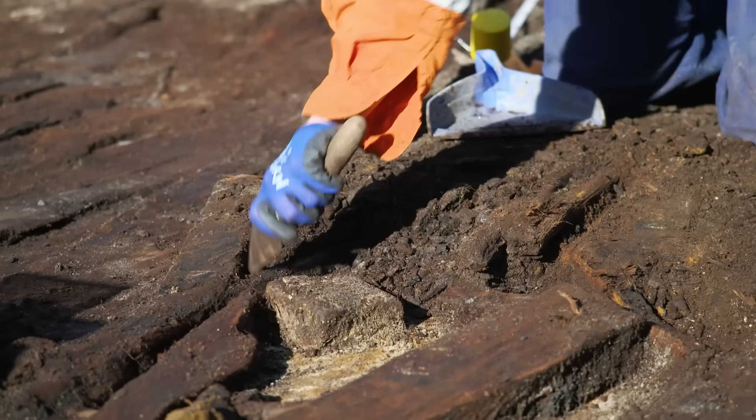Every day the archaeologists work is a day lost excavating the Barangaroo station. Ali puts a brave face on what is for him an unexpected situation. It's a bit of a pain, but it's the right thing to do. The right thing to do, perhaps, but the schedule has just gotten a lot tighter. This historic discovery risks delaying Ali and the team's progress.

Work might have stalled at Barangaroo, but tunnel boring machines wait for no one. Time for action stations. Time to fire up the mechanical monsters and launch the TBMs.

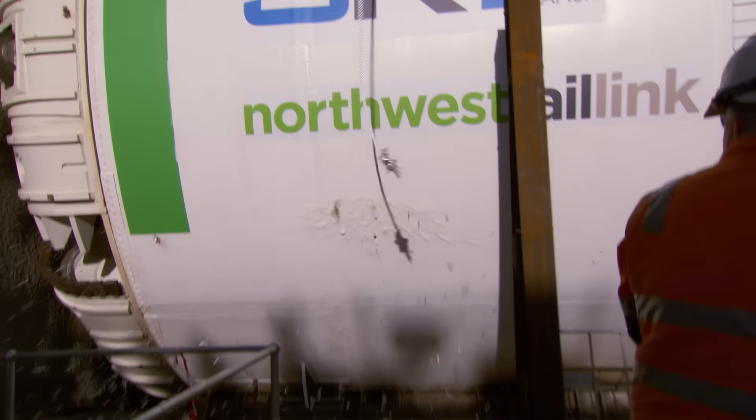The high-risk job of digging 61 kilometres of tunnels is underway through sandstone and shale and down to 58 metres at their deepest point. Hundreds of tunnellers working around the clock in giant underground mechanical factories where there is danger at every turn.

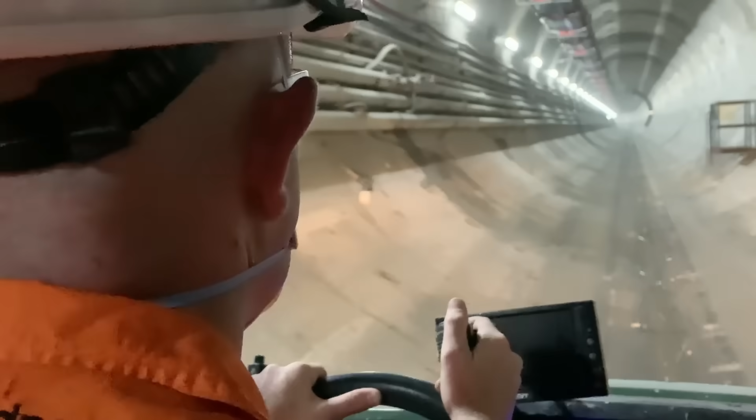TBMs are only ever given female names, a long-standing tunneller convention. Working in the underworld, they're a superstitious group. At every dig, there's a statue of Saint Barbara, the patron saint of tunnellers, providing protection. Well, you've got to take every bit of luck you can get, don't you, in this game? It's high-risk construction. We'll take every bit we can get.

The 8 TBMs that have launched will dig almost 60 kilometres of tunnels, but not those under the harbour. The 2 tunnels beneath the harbour are the shortest any of the TBMs will dig. It's less than a kilometre from Barangaroo to the North Shore. It may not be far in distance, but it will be by far the most challenging and most dangerous tunnelling on the entire project. The team is about to discover what really lurks beneath the surface.

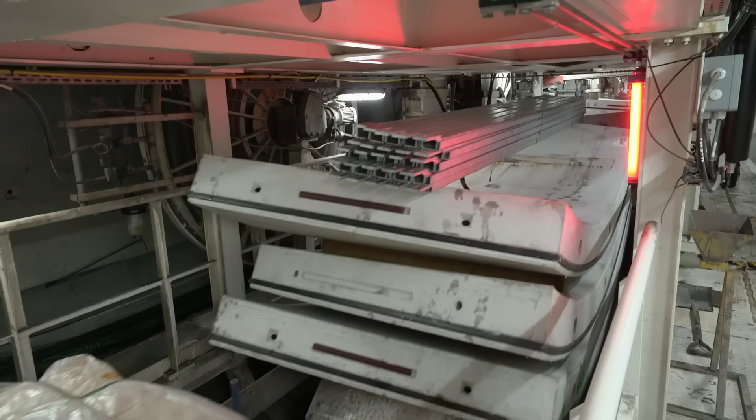Next time, the TBMs fire up on all cylinders. We're the guinea pigs really, so... Skyscrapers in the middle of Sydney need to go. The biggest challenge is for the 28-storey building. And a TBM weaves its way through narrow city streets. Need to get the TBM across the road. Let's go.